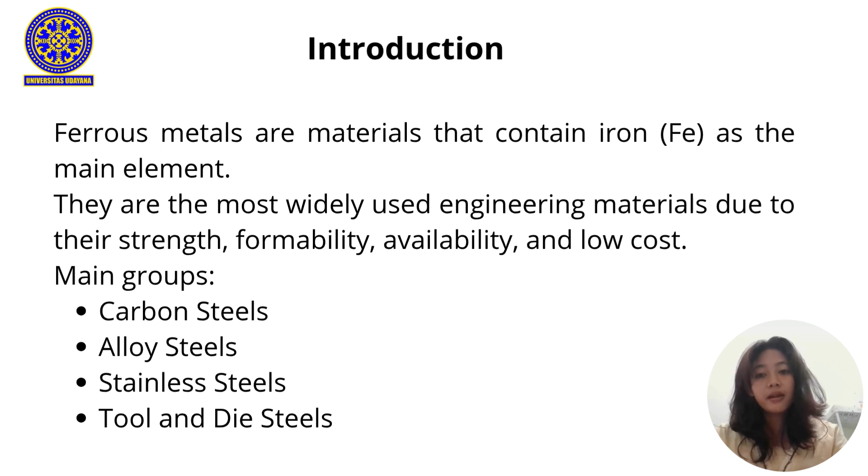After, we focus on how these metals are produced, processed, and applied in engineering. 5.2 Production of iron and steel. The production of ferrous metals begins with extracting iron from ores and refining into steel. Raw materials: essential materials required are iron ore, the main source of iron, coke, a carbon-based material made from coal that acts as both fuel and reducing agent, while limestone reacts with impurities to form slag, which can be removed easily.

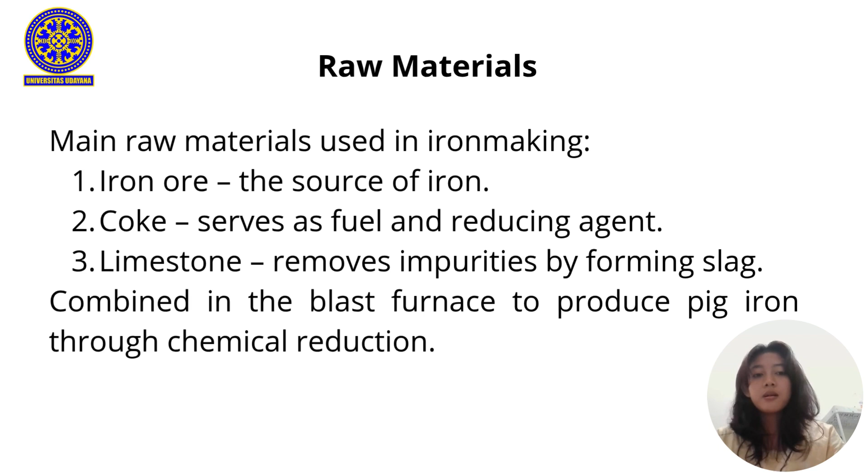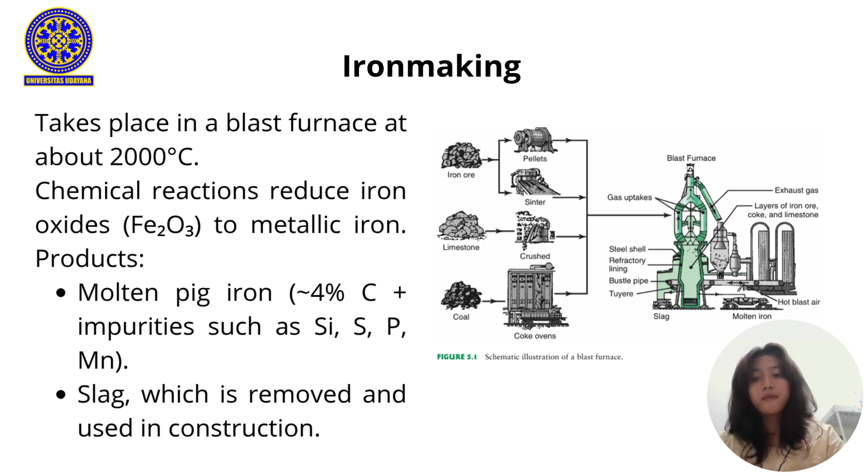These materials are layered and charged into a blast furnace for smelting. Iron making: the blast furnace is a tall vertical structure wherein ore, coke, and limestone are heated to about 2000 degrees Celsius. Hot air is blown from the bottom, burning coke to produce carbon monoxide, which reduces iron oxide to metallic iron. The output is molten pig iron, containing about 4% carbon and impurities. Slag, a byproduct made of silicates and oxides, and gas, mainly CO and carbon dioxide, are released and often used to heat the furnace. This process marks the first step of producing iron from ore.

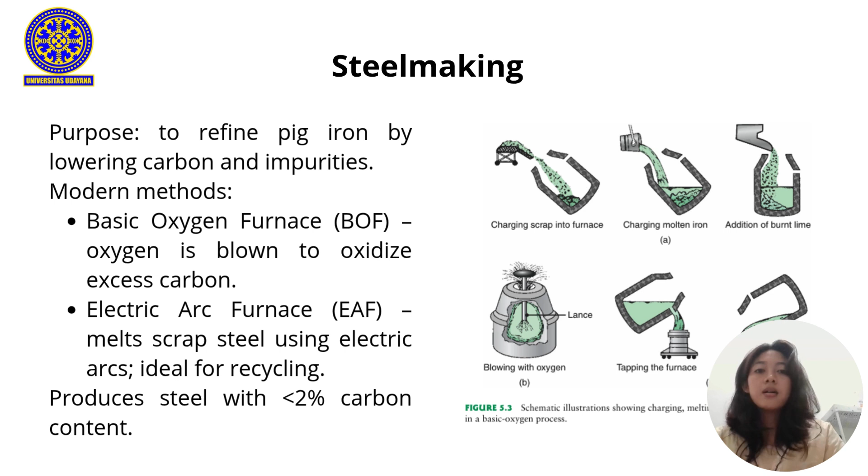Steel making: pig iron from the blast furnace is too brittle and contains too much carbon. Steel making removes the excess carbon and impurities to produce steel. Two main modern methods: one, basic oxygen furnace (BOF), where oxygen is blown through molten pig iron, oxidizing carbon into gas and slag. Two, electric arc furnace (EAF), which uses electric arcs to melt scrap steel or pig iron, mainly used for recycling steel with controlled composition and desired mechanical properties.

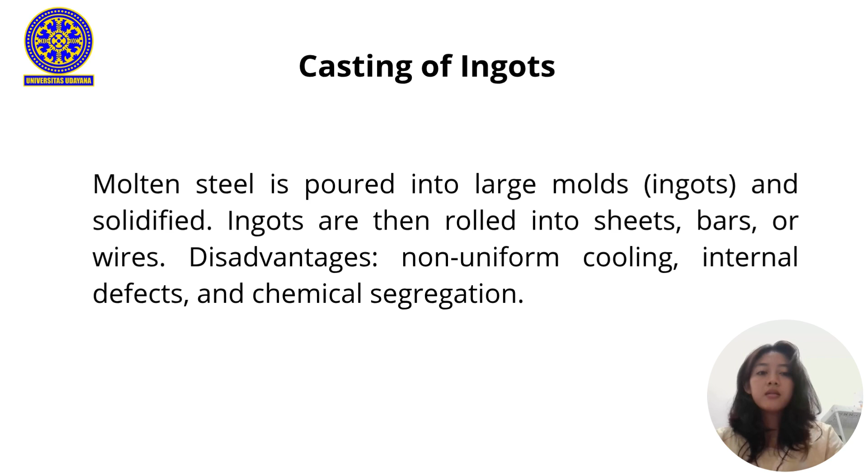Casting of ingots: in the ingot casting process, molten steel is poured into large molds and allowed to solidify. The solidified blocks, ingots, are later reheated and rolled into plates, bars, or rods. Problems: uneven cooling may cause defects like segregation and internal cracks. So the common ingot casting is now largely replaced by continuous casting.

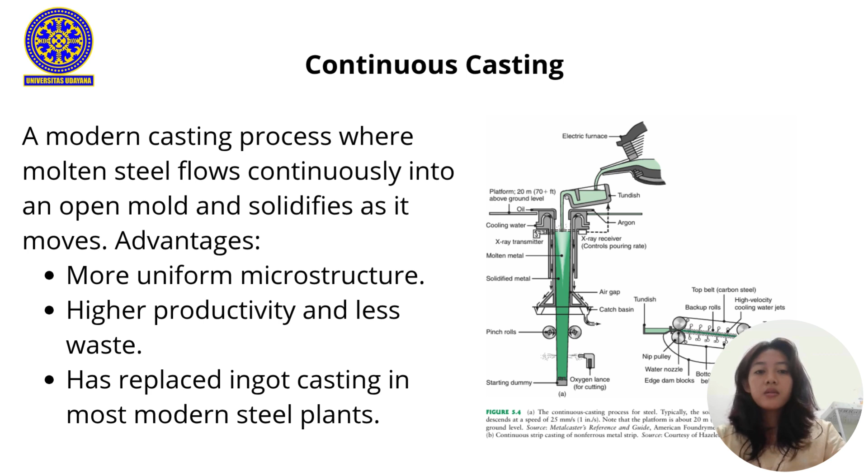Continuous casting is a modern process where molten steel is poured continuously into an open mold. As it solidifies, the steel is drawn downward and cut to length. Advantages: produces uniform structure and better quality steel, reduces waste, and almost all steel today is produced by continuous casting.

Carbon and alloy steel: steels are categorized mainly by their carbon content and alloy composition. Effects of various elements in steel: each element affects steel properties. Carbon increases hardness and strength but decreases ductility.

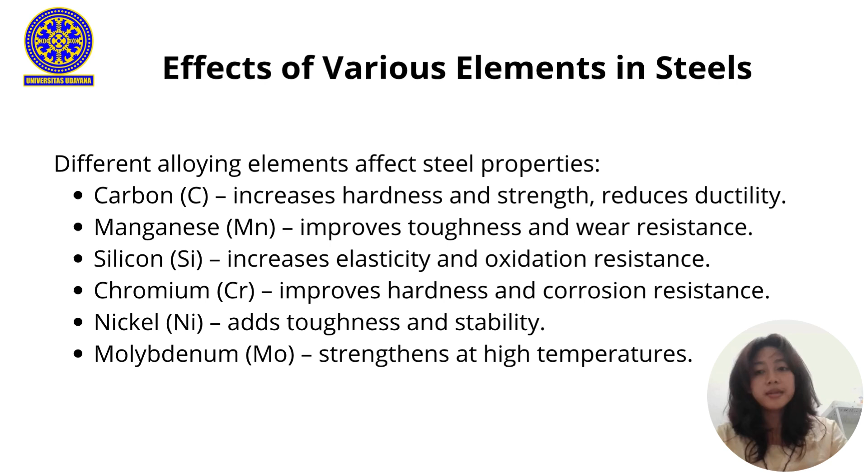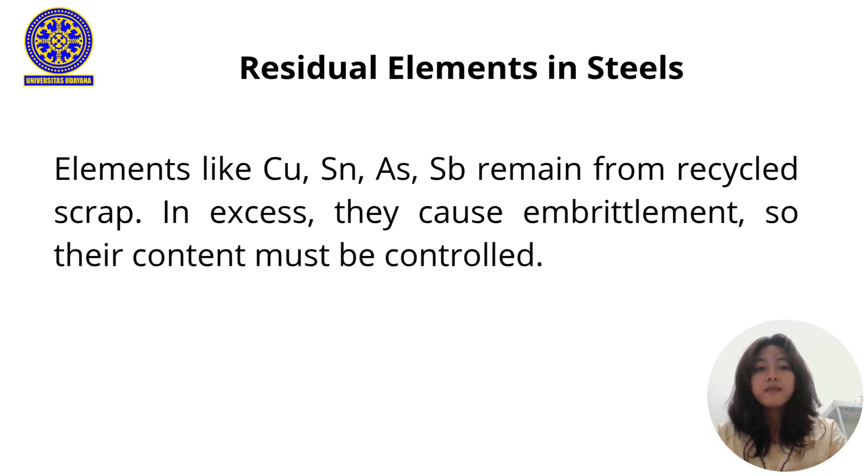Residual elements in steel: residual elements like copper, tin, arsenic, and antimony remain from recycled scrap. This can cause embrittlement or loss of ductility if their amounts are not controlled.

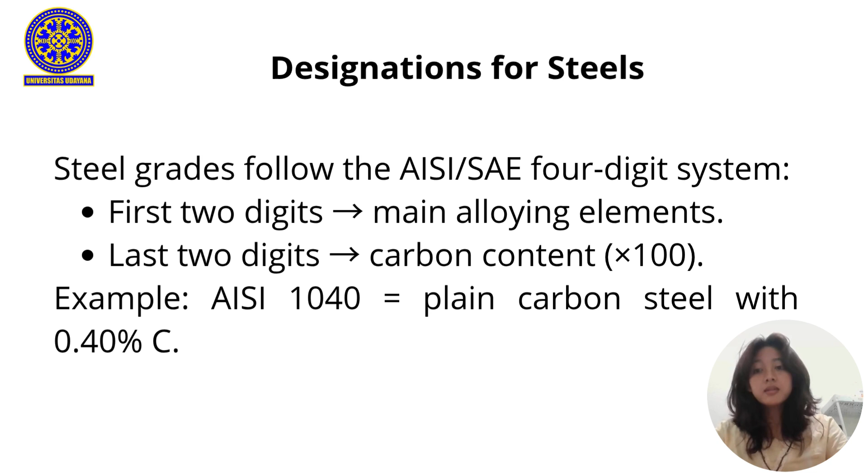Designation for steel: the AISI/SAE system is used to identify steel grades. First two digits indicate alloying elements, last two digits indicate carbon content. Example: AISI 1040 means plain carbon steel with 0.40% carbon. Next, carbon steel divided by carbon content.

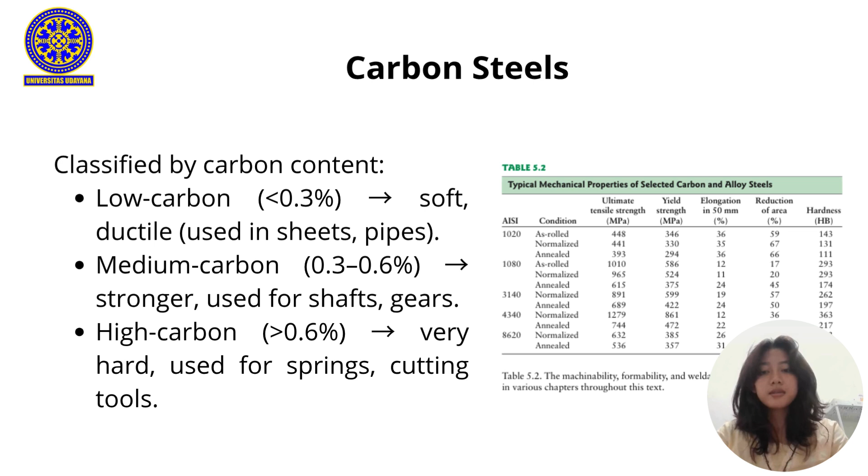Alloy steel contains elements such as Cr, Ni, Mo, V, or W to improve performance, providing better mechanical strength, toughness, and heat resistance. Widely used in automotive parts, tools, and structural components.

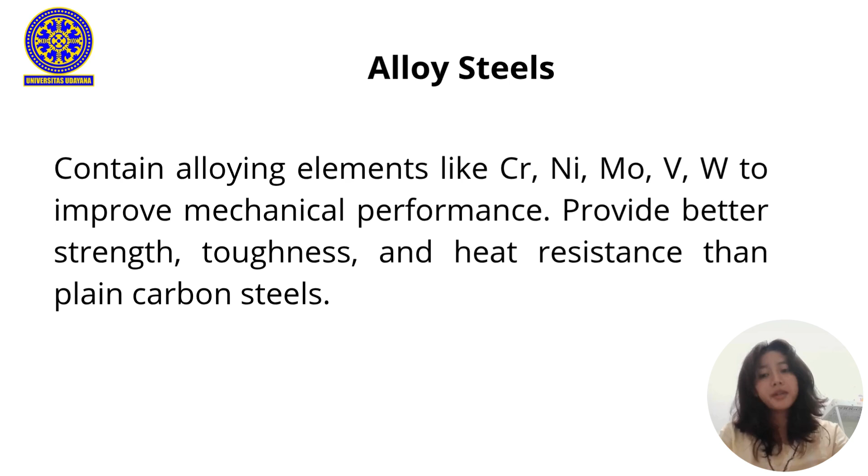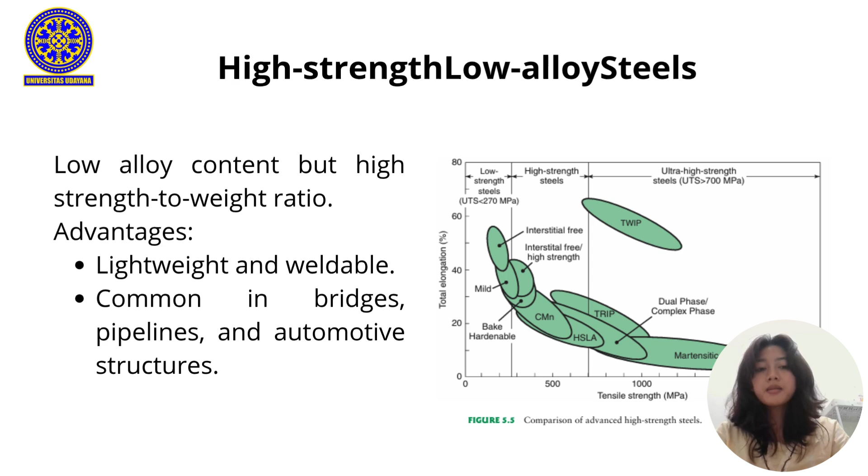High strength low alloy steel (HSLA) contains small amounts of alloying elements, yet exhibits very high strength, lightweight, good strength, good weldability, and corrosion resistance. Commonly used in pipelines, bridges, and chassis frames.

Ultra high strength steel has tensile strength above 1,380 MPa or 200 KSI, achieved through advanced heat treatment and high alloy content. Applications include aircraft components, military vehicles, and performance parts.

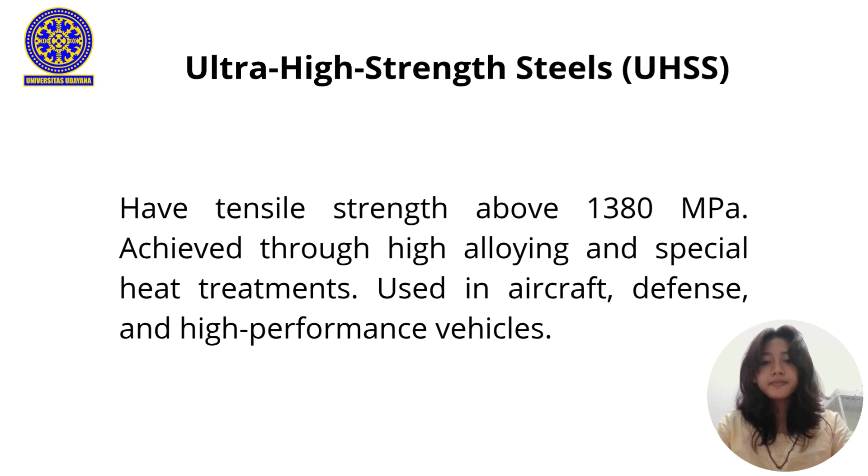Stainless steel contains at least 10.5% chromium, forming a protective oxide layer. This reference lists 4 types: austenitic, 300 series, non-magnetic, excellent corrosion resistance, used for kitchenware, medical tools, and ferritic.

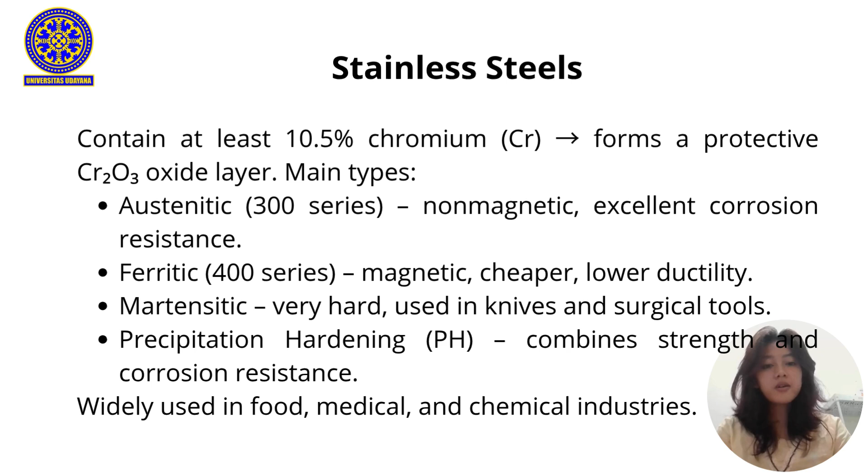400 series, magnetic, lower cost, moderate corrosion resistance, maintains high hardness and strength, used for knives and surgical instruments. Precipitation hardening (PH) combines strength and corrosion resistance for aerospace applications.

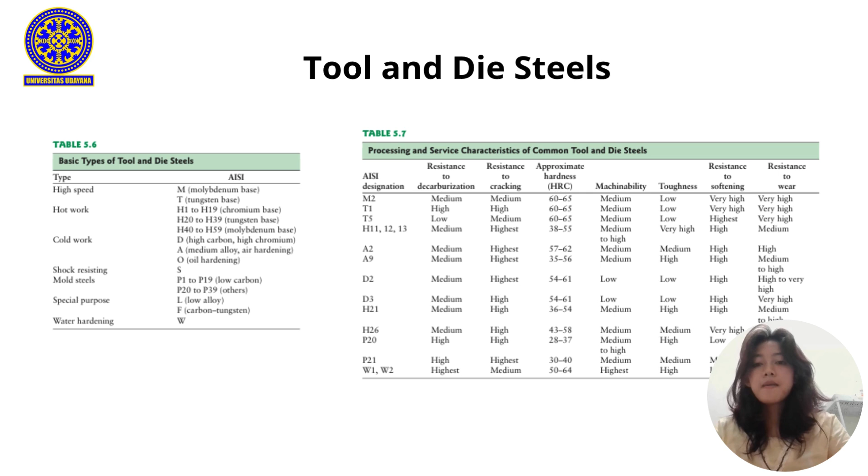And 5.7, tool and die steels are used for making cutting tools, molds, punches, and dies that shape other materials, as shown in Table 5.6 and Table 5.7.

High speed steel is designed for cutting operations at high speed, maintaining hardness up to 600 degrees Celsius. Alloyed with tungsten, molybdenum, chromium, vanadium, and cobalt. Common uses: drills, milling cutters, and lathe tools.

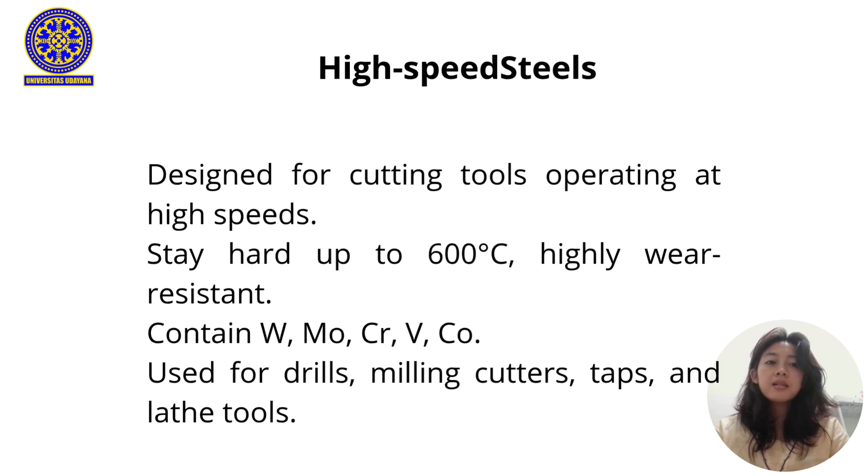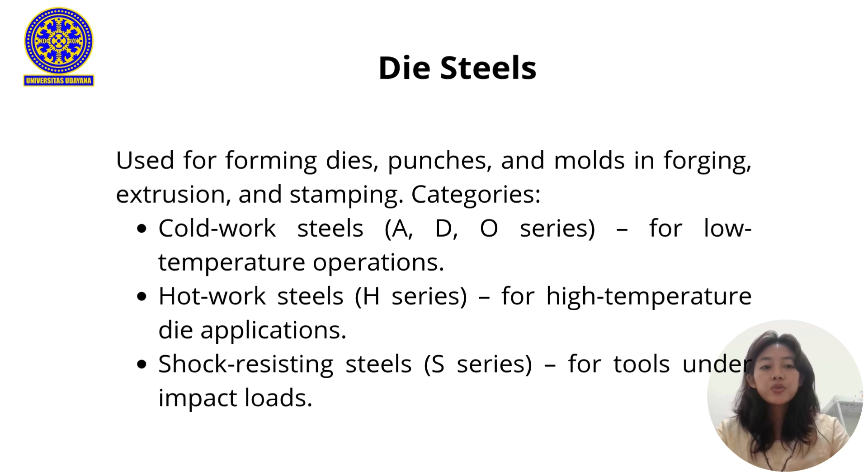Die steels are used in forming processes such as forging, extrusion, and stamping. Categories: cold work steel, A and D series, for low temperature applications; hot working die steel, H series, for high temperature applications, resisting high heat and pressure; also shock resisting steel, S series, which absorbs rapid impact loads and vibration.

Ferrous metals are the backbone of modern industry. Innovations like HSLA, stainless, and HSS steels have improved strength, durability, and corrosion-resistant features. Quick corrosion and energy-intensive production remain challenges, but continuous material engineering keeps enhancing their performance.